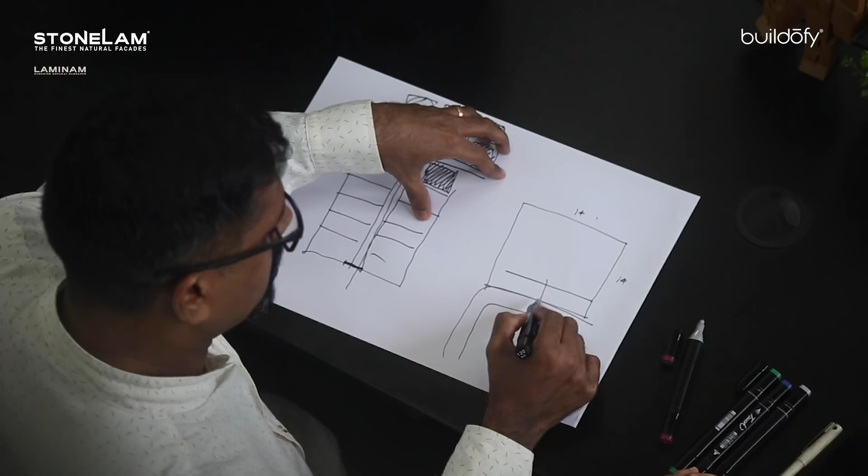We have a relatively square-shaped property of about 14 meters by 14 meters. Considering that we are to leave 3 meters in the front, 1.5 meters in the back, and 1 meter and 1.2 meters on the sides, what you are left with is about 9 by 11.5 meters of footprint.

The road forks here, so we decided to have the carport in the setback itself, because we had very little footprint otherwise to build as per the bylaws.

The client had mentioned that they did not want a conventional house, so we decided to let go of the compound wall in front, because the road there was relatively traffic free. Instead, we gave a small portal sort of wall with an entry from the road, and the side was completely open, so kids could play football or cricket as they want, since it becomes one larger foreground.

The moment you enter the house, we wanted a very large, open, spacious layout. So the only closed space you see is here, which is a toilet. And here comes the staircase.

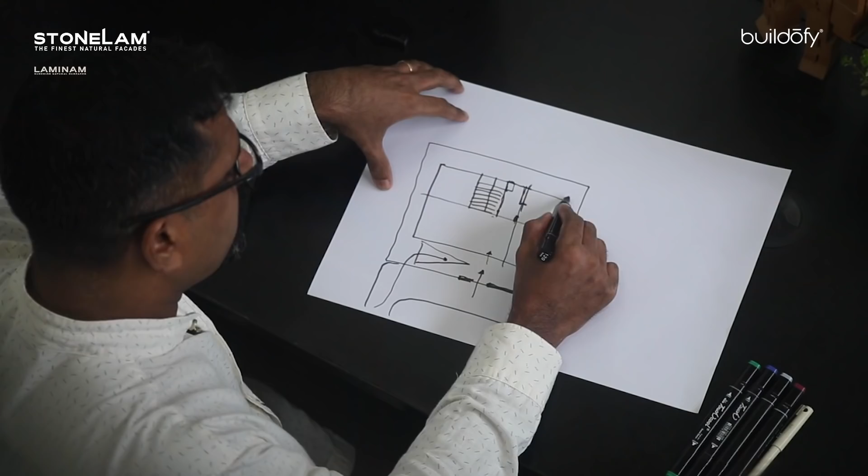We have the bedroom here, which again can be closed by a series of sliding shutters. The living room was placed here, which is an open sort of format. The dining happens here, and the kitchen would happen here.

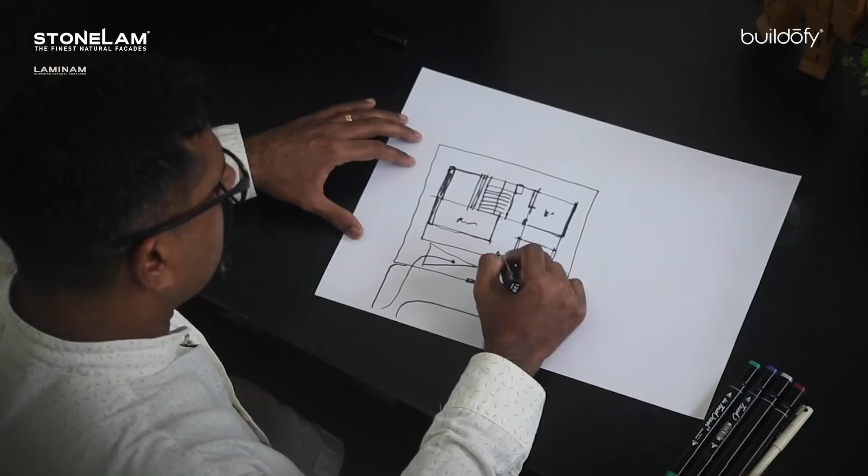The kitchen counter extends into the dining space, so from here you have only a partial view of the kitchen, but the cooking area is hidden from the entry. So the moment you enter into the house, you have a large volume.

We decided to have these landscape pockets inside the house, and at this entry we would have these platforms by which you can access spaces. This is the kind of large volume you see the moment you enter the house.

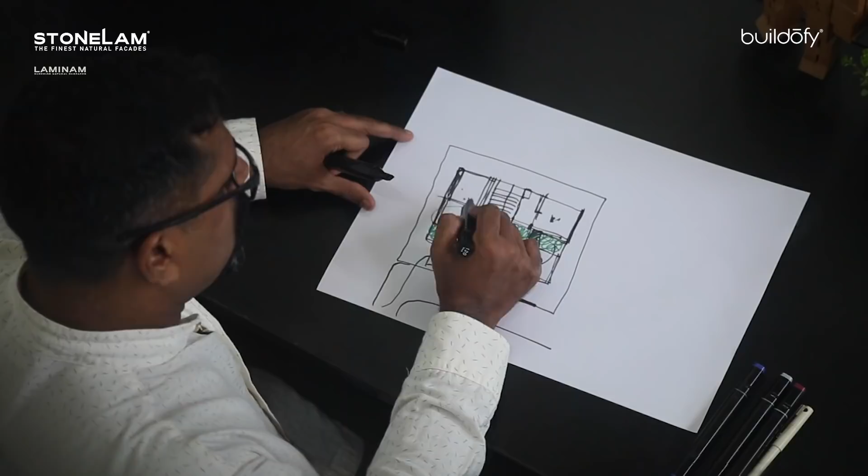Moreover, if you keep the bedroom and the kitchen also partly open, you have a relatively very large layout. And this toilet is accessed from this part and from the bedroom.

Now, this being the south side, we have actually taken this setback area into the built space. So what we've done is created a landscape pocket here as well, which can be viewed and accessed from the bedroom. As you might know, the sun actually travels mostly through the southern side.

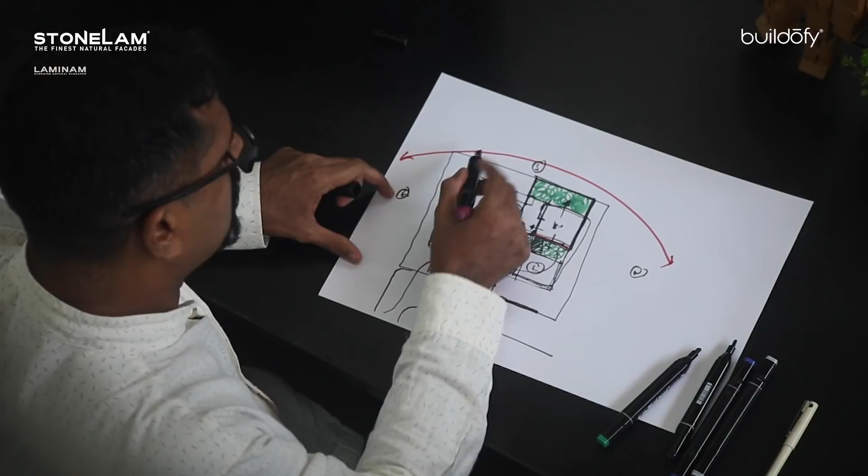This being a relatively hotter side, we have given very few openings onto that side. One large opening that faces that side is from the bedroom, but then it is actually into a trap courtyard.

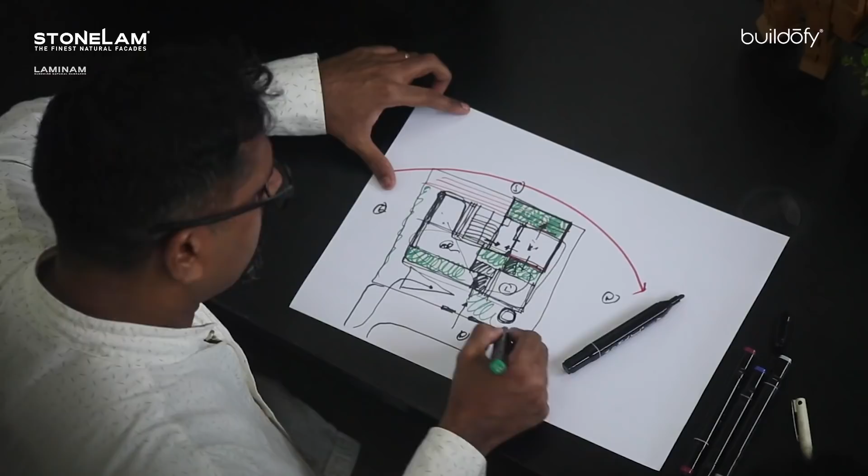We have an existing well here, and there's very little left for landscape. To make the kitchen more efficient, we have taken up the setback as a shaded utility area from where the space below the staircase is accessed.

The first floor has a similar footprint, but the layout changes slightly. The position of the staircase remains the same, and we have repeated the toilet. We have the ground floor layout on the first floor as well, and this becomes another bedroom.

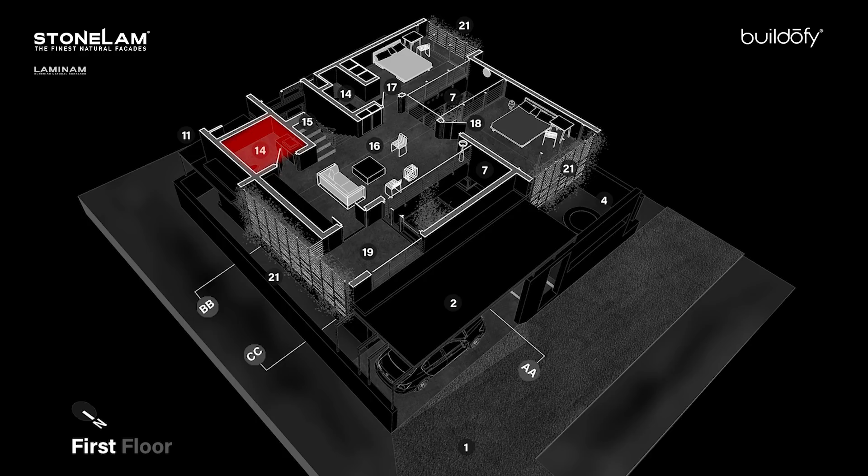Earlier on the ground floor, the bedroom opened towards the south. We can't do that anymore on the first floor because it would be hotter. Instead, we decided to open it towards the west. The client wanted a very large common toilet, and the third bedroom the client wanted was placed right above the living room.

What you're left with is a very large family space. As of now, we have not furnished the family space, but as and when the need arises, the client has decided to furnish it. And in the corner, overlooking the bend of the road, we have a small balcony.

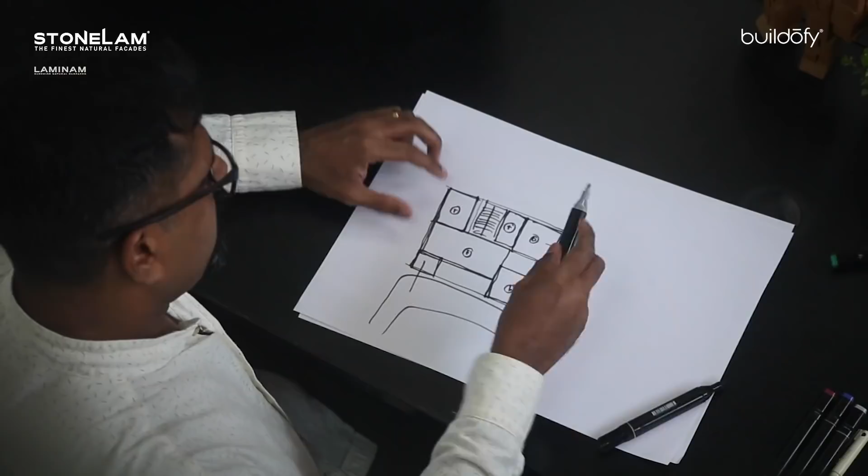So we are left with pockets, which are double height landscape pockets. These courtyard volumes, as well as the staircase volume, rise up and try to expel hot air. Moreover, we have a series of circular skylights above these three volumes and a large skylight above the balcony.

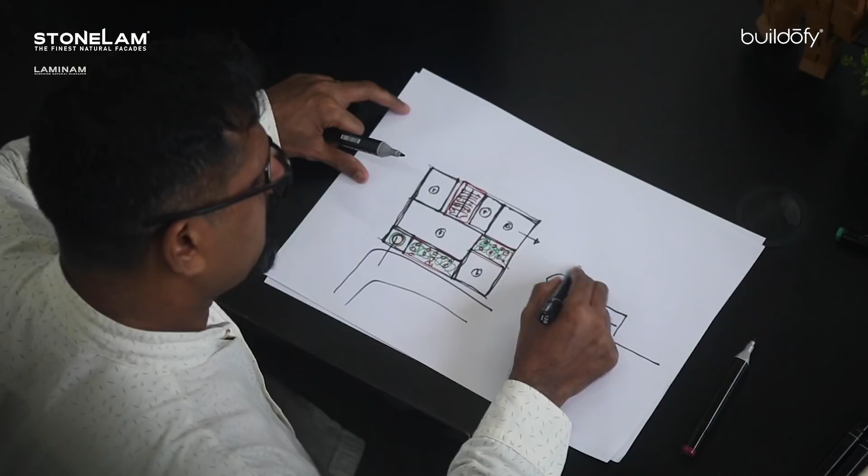If it is a very large property and you build a two-storied structure, there would likely be larger trees on the property, and these trees would relatively shade the building, keeping its temperature lower. But that is not the case here. We have this property with a tighter footprint, and we have houses all around it.

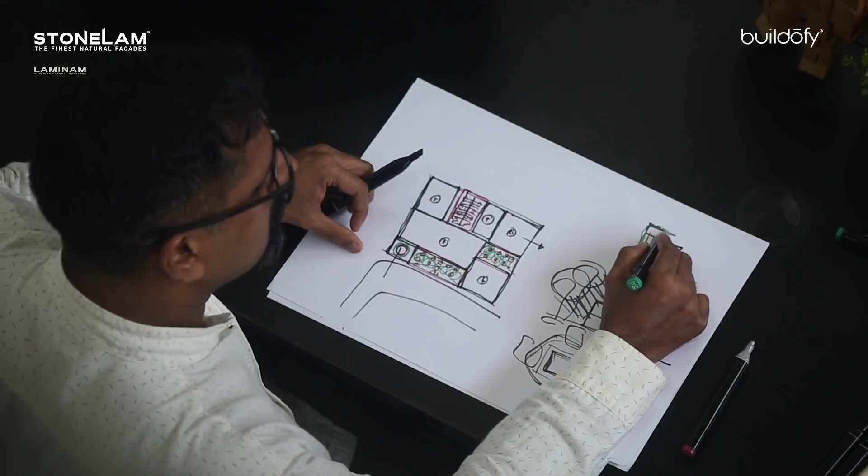We decided to create screens of vegetation. This screen would in turn shade the building, and would also be an extended garden for the clients. You would have flowering plants on them as well, and could also have vegetable creepers on them.

We decided to give a fairly large screen on the east side because we have very sharp sun from the east, and also on the western side.

Unlike many projects, the ventilation in this project is not just linear, but has these vertical connections as well. So it's more of a spatial, volumetric sort of ventilation that happens in this project.

As mentioned, we have these three vertical blocks. We have these cores which connect the ground floor to the terrace. It rises a little above the terrace as well, and you have this series of skylights.

We have clerestory on all these three blocks, so you have this cooler wind coming from the bottom. You have these courtyards and landscape all around, and you have screens on the first floor. So the breeze that comes inside the house would be relatively cooler.

And such cooler air, if it turns out to be warmer and hotter later in the summers, would travel through these shafts or vertical cores onto the terrace and then expel through the clerestory windows that we have given.